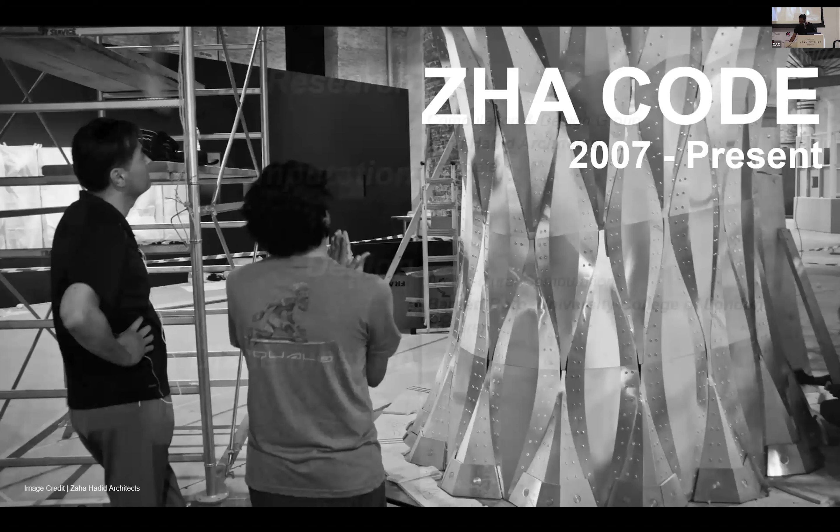On a day-to-day basis, we do three or four things: research in computation and design, and also write and disseminate this knowledge, first within the office, but also widely through workshops around the world.

A bit about the CODE team, an acronym for computation and design, started in 2007 by Nils Fischer, Shajay Bhooshan, and Patrik Schumacher, who is the principal. It started off as a project-independent research group, looking at geometry processing and digital manufacturing technologies.

As the research has matured over the last 15 years, the kind of projects we do in the company has also changed. Early on, we were doing smaller scale projects, and as the technology has matured, now we are able to apply the same to larger scale projects like stadiums, infrastructure projects, museums, etc.

The team is currently made up of 22 people, mostly architects with varying degrees of interest in computation and design. Some are more interested on the compute side, developing tool sets; others are more interested on the design side, how to use computation in early stage conceptual design.

The research strands we have in the team look at four things: high performance geometry, game tech and participatory systems, future twins, and machine learning and AI. Hopefully I'll cover a bit of each of these topics in the presentation.

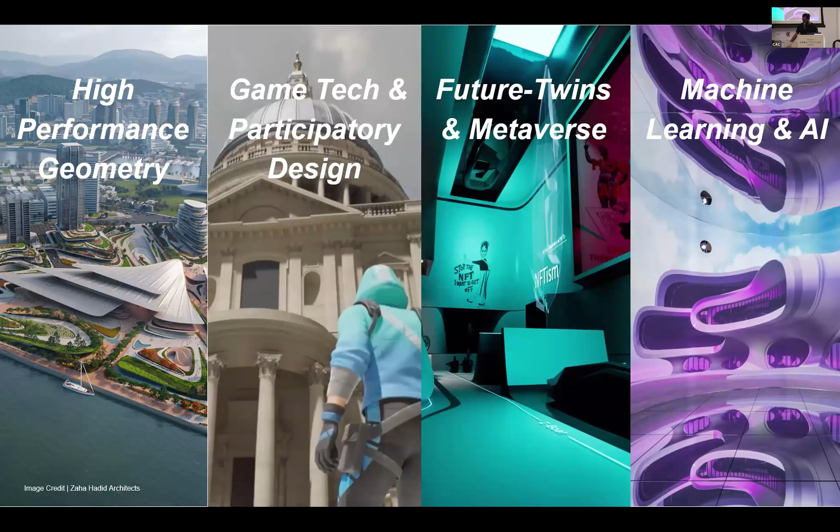Typically each of these strands goes through four steps: you start off as project-independent research, develop toolkits, and showcase its application in what we call pilot projects or special interest projects. Once the tools and technology are robust enough, they get applied to larger scale commercial projects in the office.

So the presentation is structured as follows. We'll talk about the framework which powers all of this, looking at the current technology demonstrators we are working on, specifically focused on digital concrete. Then we look at how we are making these participatory systems using geometry for all, and also future twins and AI systems.

So the spatial technology stack, what is it? We call it Z-Space. We believe architecture is a cultural production enabled by technology. It has been the case since the beginning of times. Even if you look at Gaudi structures, we're always blown away by the spatial qualities and visual imagery of the spaces, but there has always been a technological remit powering it, in this case graphic statics, masonry structures, and so on.

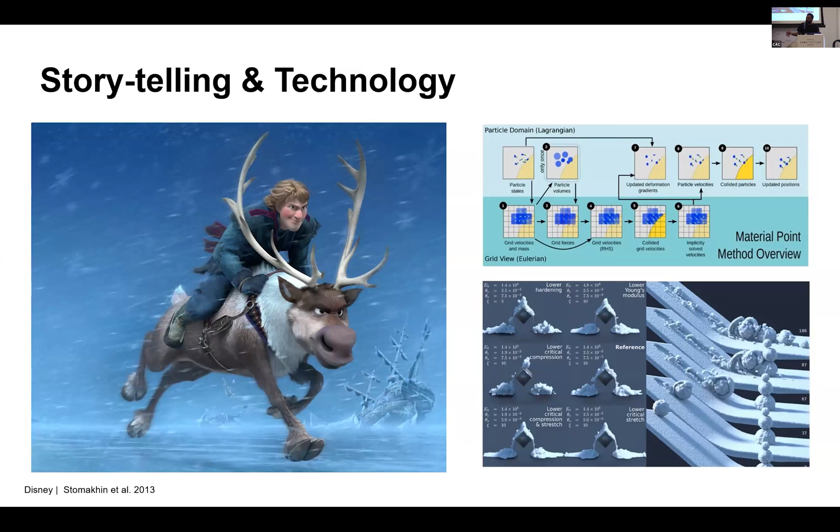Same is the case with computer graphics and animation industry. We're always blown away by the visual aspects of these CG movies, but if you look deeper, the technology supporting it, as explained in most of the presentations today, is also very novel, and these could easily be adapted into architectural design as well.

So as a group, when we started looking at the framework, we wanted to look outside our lamppost. We're mostly architects, and we didn't want to find solutions only within our remit, but to look at someone else's lamppost so that we can borrow and build upon what's already there. So what can we borrow from animation and the computer graphics industry?

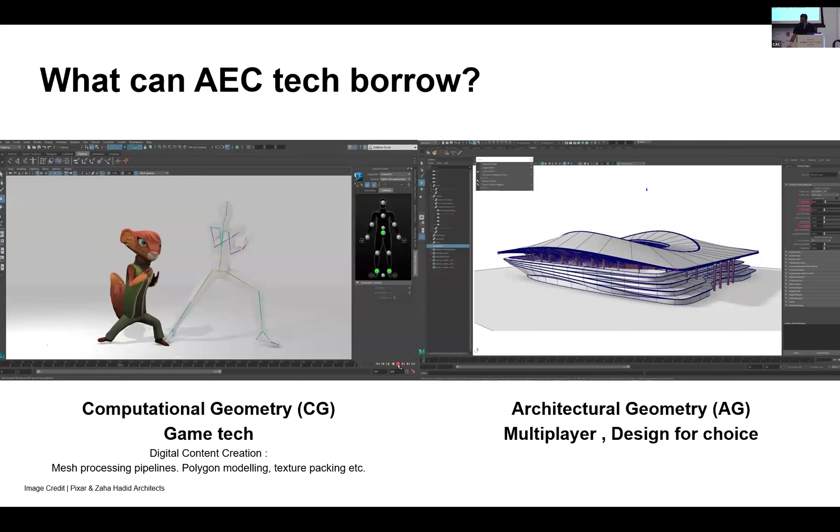These technologies include computational geometry, a subset of which is called architectural geometry in architecture. Game technologies you can borrow for multiplayer systems and designing for choice—we'll take a look at that as the presentation goes on. You can also look at file formats like USD, which has been around from Pixar for the last 30 years or so, and you can now access those much more easily through NVIDIA's Create Kit.

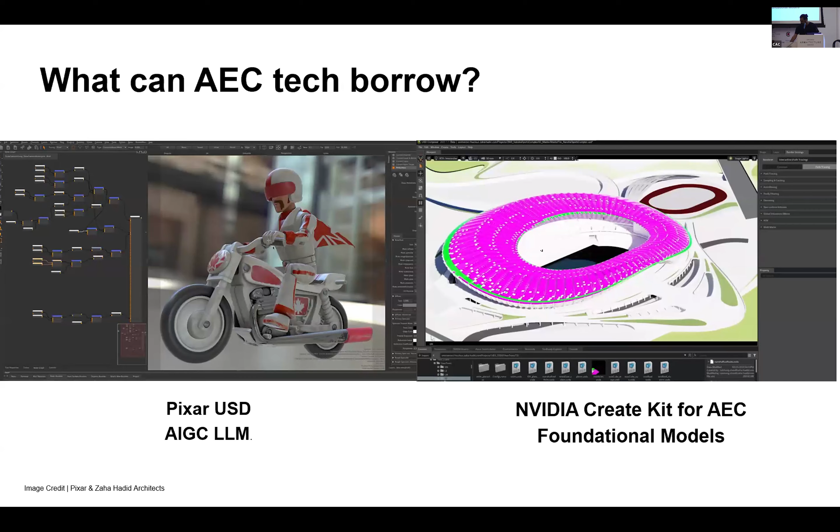The same goes with AI as well—there's a lot of foundational models we can borrow, and then build on top of it the architectural applications we want. So basically, a spatial technology stack is a combination of these divergent spatial technologies, which includes architectural geometry, game technologies, and AI. The framework itself borrows from a wide amount of research happening both in academia and in industry, in technology companies like NVIDIA and Autodesk, etc.

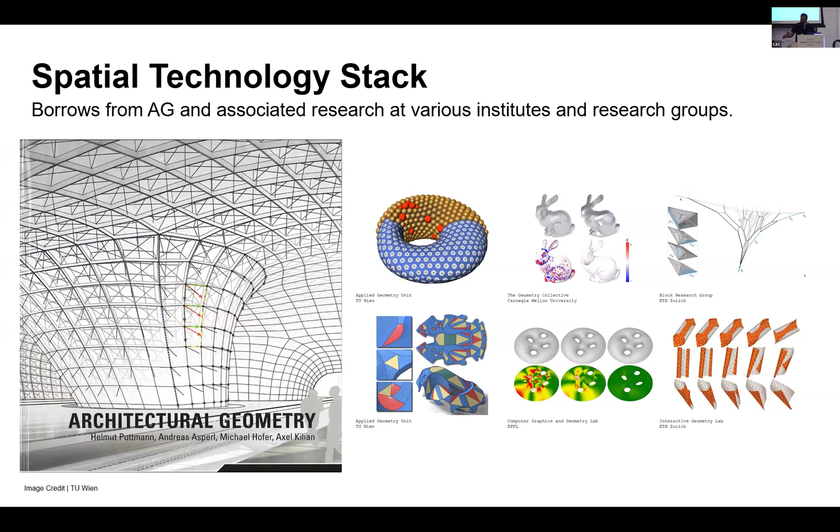The spatial technology stack, as we currently have it, covers both the content creation aspect, where typically we've been involved in early stages of design. It involves a lot of geometry processing, creating tools amenable for robotic and digital manufacture, like 3D printing. It also looks at later stage delivery of projects in schematic design and DD. In between is the game tech, which powers all the configurators, integration of our tools in games, etc.

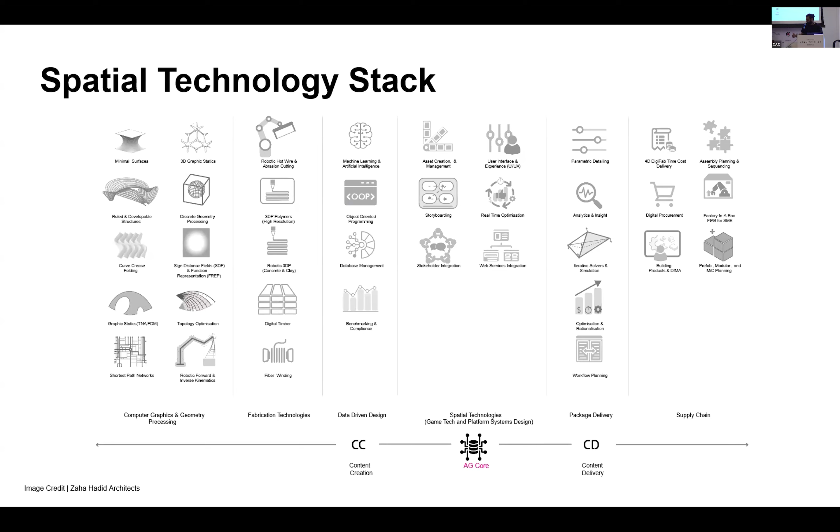The stack is also independent of the softwares we have in the office. You can see a wide range of softwares we use, from conceptual tools like Autodesk Maya, to delivery of the project in Revit, Rhino, and now also looking at Omniverse, Unreal, etc.

Looking at the first aspect of high performance geometry, I'll take you through a project which has been a collaboration with the Block Research Group at ETH, who are researching masonry structures, and Incremental3D, a robotic 3D manufacturing company, along with Holcim, the material research company looking at creating custom inks for 3D print.

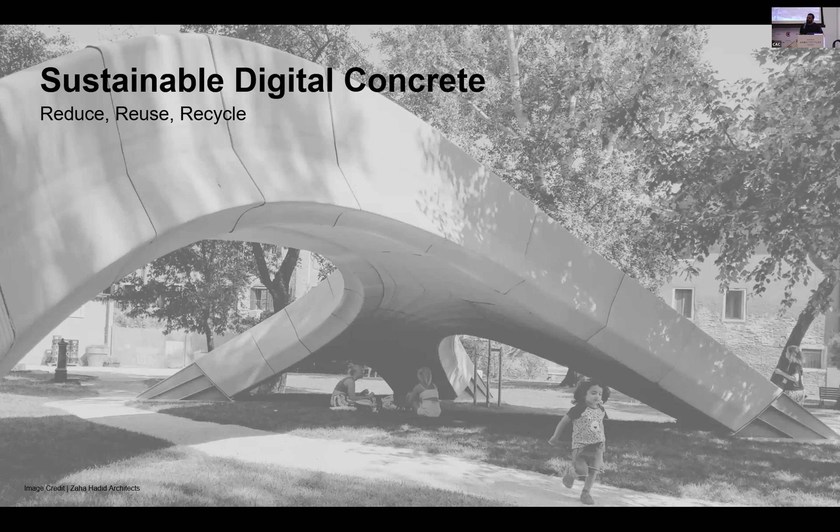When we started the project or collaboration, we were trying to bring up a new language for concrete, using the wisdom of masonry and adapting it into digital technologies of manufacture. The goal was to have these 3 Rs: reduce the amount of material required, reuse the blocks which were printed, and recycle by doing material separation. All of this was achieved through what we call strength through geometry, trying to reinterpret masonry structures using 3D printed concrete blocks. You can think of these blocks as synthetic stone. This is possible because you're aligning your systems or the geometry into the structural force actions.

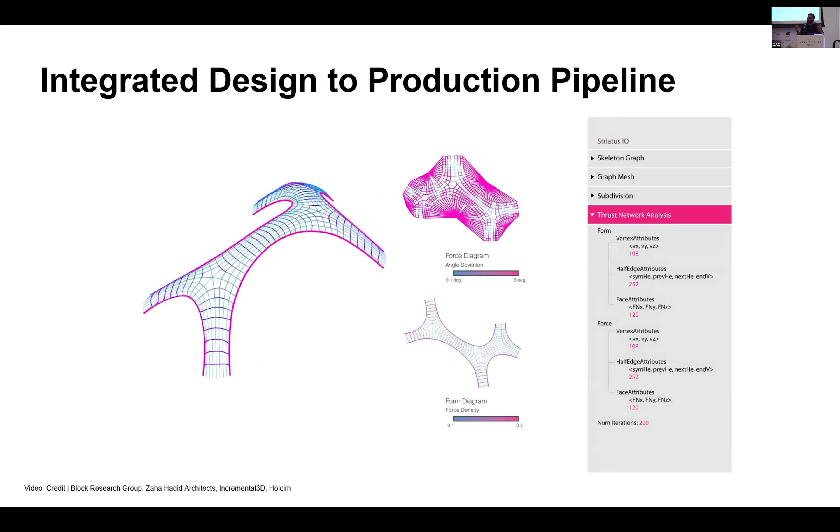This was all made possible through an integrated design-to-production pipeline, where we as designers, structural engineers, and fabricators were all able to collaborate on one platform. That platform considers the file format you see on the right. As each and every step is being done, a schema or additional attributes are added into the file format.

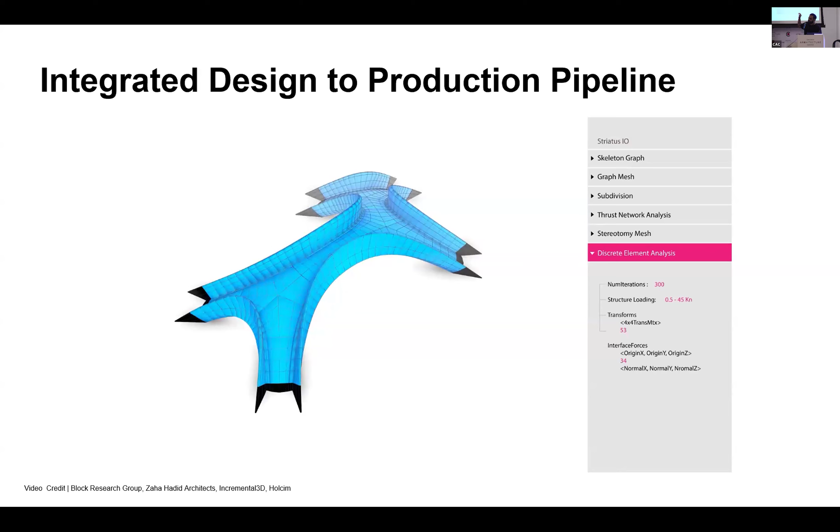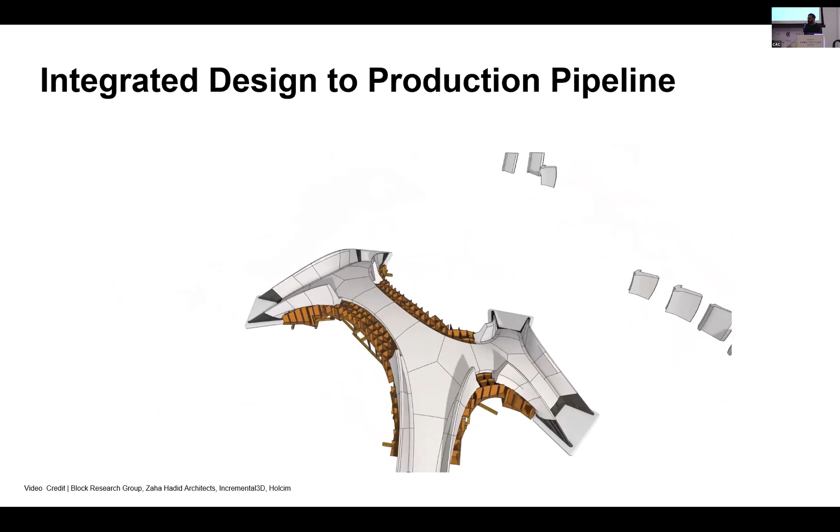This includes going from generation of the geometry, the structural performance using form finding, then looking at stereotomy of the blocks, splitting them into 100 blocks or 50 blocks, right towards the end of the G-code of each of the blocks. It can also store schema, which also enables you to store the sequence of assembly, what should be the scaffold in this case, which was one of the items of research we continued further.

What was useful about this was we, as designers, could make changes on the design till the last day, till the robot was pressed play to print the blocks. This was printed by Incremental3D in Innsbruck.

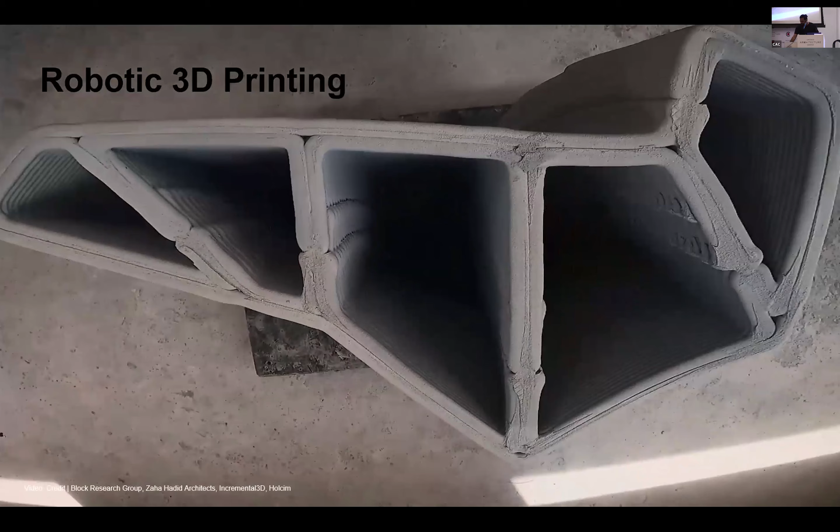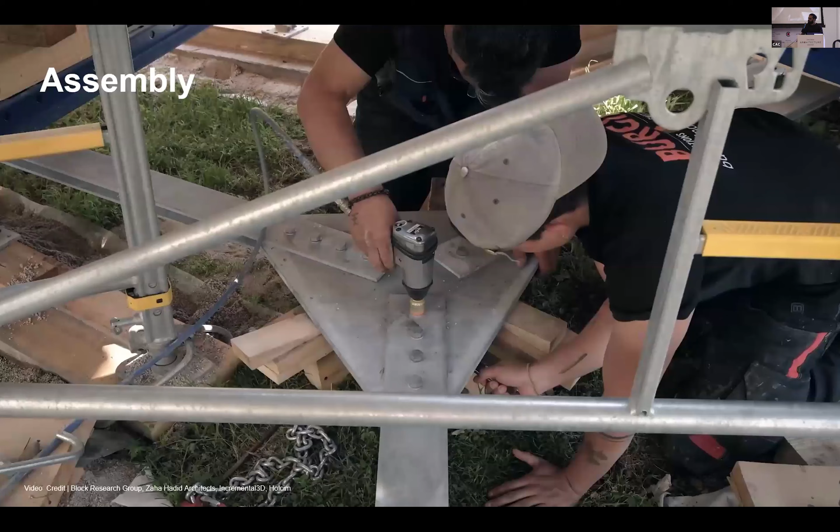On site, this was for the Biennale project in Venice. All of the blocks were shipped over. Some of the blocks were as big as 2 meters in height and 2 meters in width, and these were assembled one by one on site. You can see in this case we had to use a single-use scaffold waffle structure. This was done because of lack of time at that point, but this was subsequently researched in the next version, which was a more permanent version of the bridge.

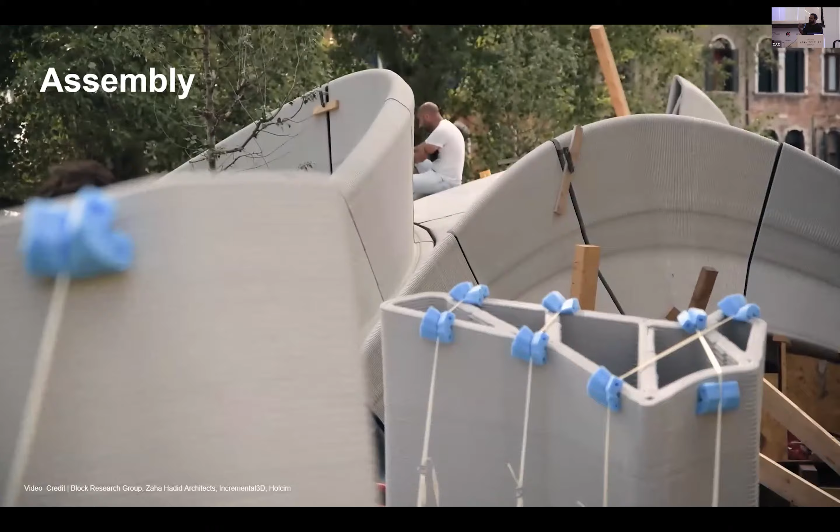In this case, you can see these neoprene pads, which give friction. There is no glue holding these blocks together. Once the last keystone goes in, it performs like an arch, and the whole structure stands in pure compression. This enables the material to be separated—if you want to dismantle it, it's easy to dismantle, take it away, and assemble it somewhere else.

Learning from the mistakes or the things we made in the first version, a more permanent version was done for Holcim to look at the long term. They wanted to research how the material performs over a period of 5 to 10 years. So a permanent version was created, called Phoenix.

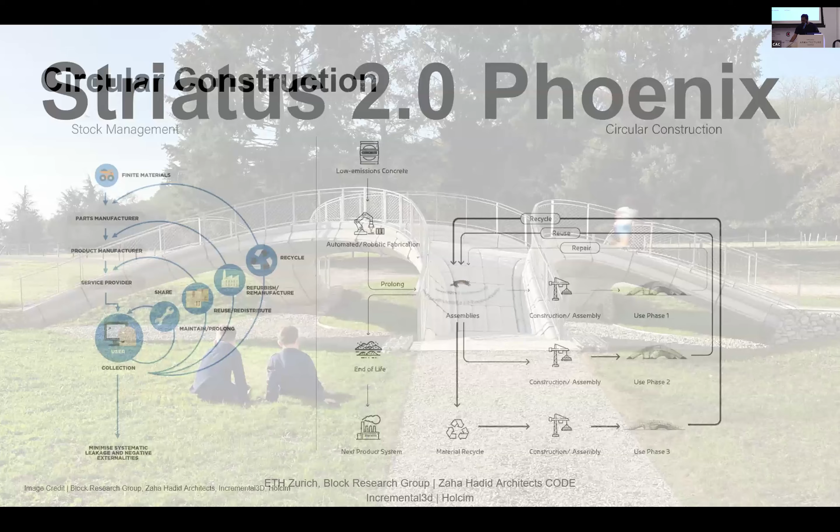In this case, we were looking at circularity of construction. As I said, the materials were disassembled, and the same material was used to recomposite and build the new blocks of the new design. The design was changed to accommodate all the variations and updates we could think of, both in structure and fabrication, from the first version, but it also showcases that the material could be reused. In the first version, we used steel as the foundations, and that steel was used in some other project, not this one, because the concrete material itself was reused in this current project.

So the improvements we made were to again try to reduce the amount of material required. We went back and looked at the bracing strategies, and the more important change was to reduce single-use scaffold systems. You can see the image on the left has more timber waffle material, but on the right we were trying to use mostly reusable steel scaffold. Because it's a double curvature geometry, you still need some amount of waffle structure, but the amount of wood used from version 1 to version 2 is about 50% less.

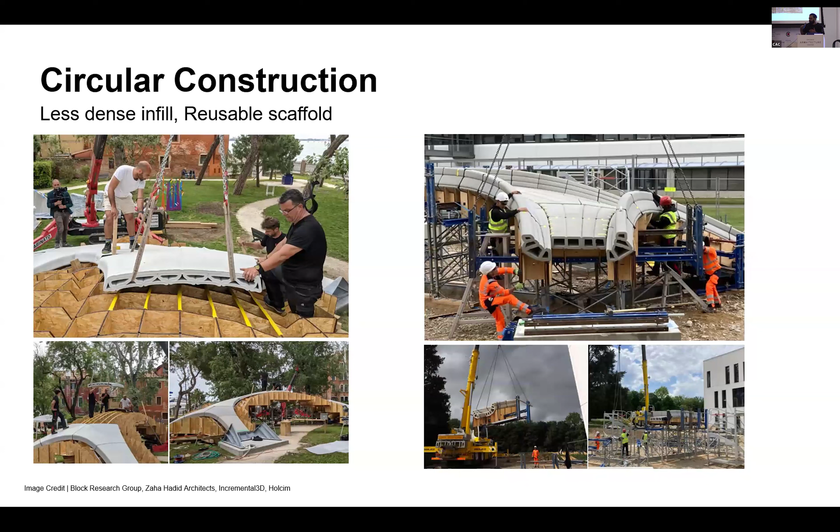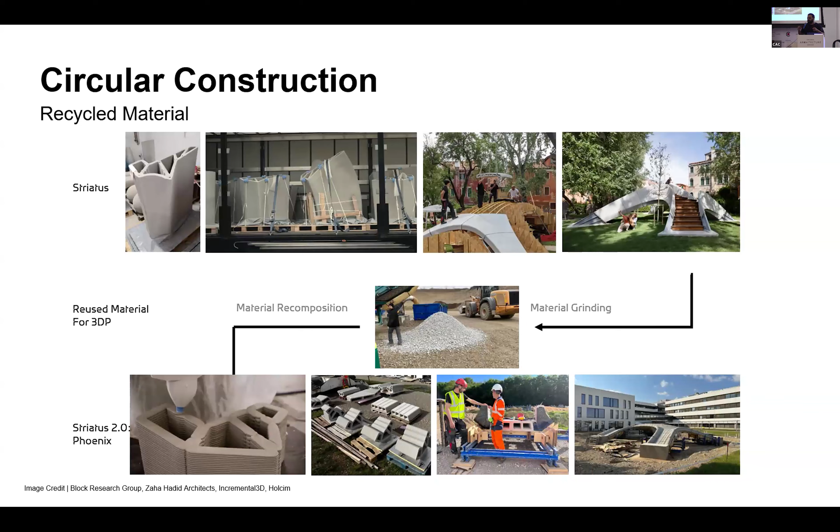All of the material used in the previous version was recycled and reconstituted into the new blocks. The new blocks were also made slightly smaller so it's easier to ship and assemble. Previously, in the first version, we assembled one block at a time, but in this case there were like 6 or 7 blocks assembled at one point and put in the correct position. So this technology is now getting more widely accepted, and this is getting continued on.

Okay, the video doesn't seem to work, but we are building hydrogen stations for Natpower, which is using the same technology to build hundreds of these stations in the Mediterranean.

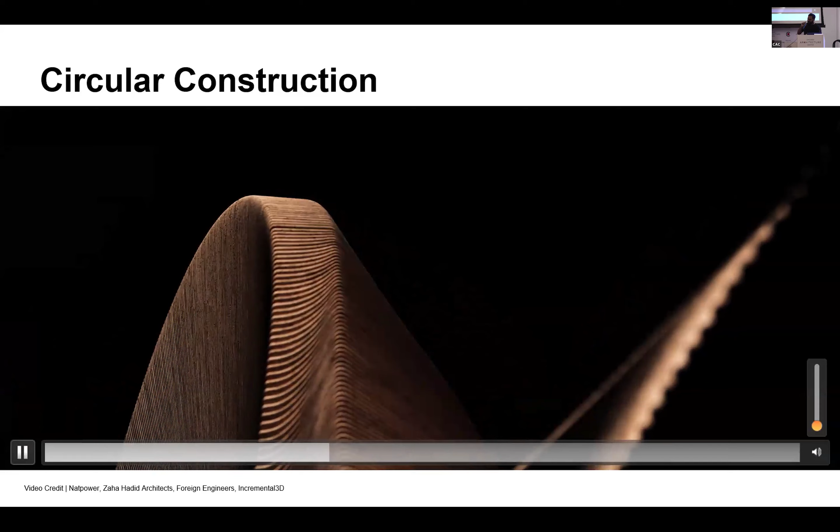Okay. The link's great.

So the research is actually being continued forward, looking at 3D printing, now with carbon negative concrete. This is research we are doing with other collaborators, specifically University of Ghent, where we are trying to build up a mix, a 2K mix, for carbon negative and carbon neutral concrete, and then showcase its applicability in architectural build systems. These kinds of research we develop further with other technology demonstrators and collaborators as well, looking at fabric formwork for concrete, robotic hot wire cutting, thermoplastic printing, and so forth.

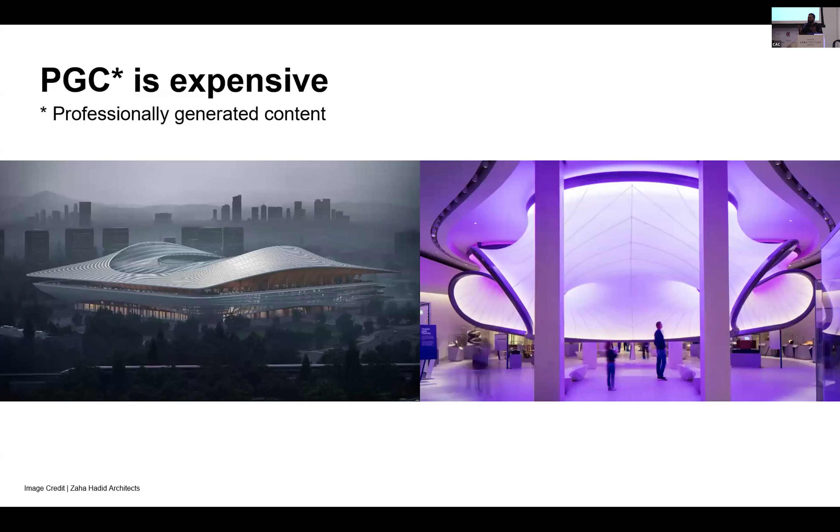The next aspect we wanted to show was called geometry for all. The things we showed previously, looking at developing custom tools and custom research, are predominantly at the initial stages very expensive, because a lot of time goes into creating these tools, researching them, and making tools applicable to design, and so forth. This has been, as you can see, looking at tensile structures, 3D printing, hot wire cutting. All of these novel technologies take time to understand and build custom tools for design.

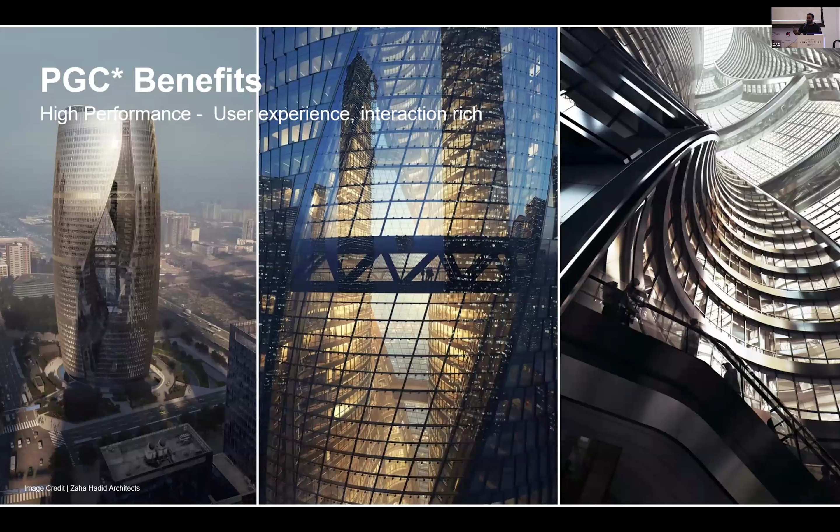But at the same time, we saw benefits of looking at professionally generated content, or PGC, because they're immersive, spatially coherent, and spatially very interaction rich. We also saw in the previous project there are structural benefits, material benefits, and they are high performance, so you can use lesser materials to achieve the same geometry. So these are all the benefits, but at the same time they're expensive and time intensive to make.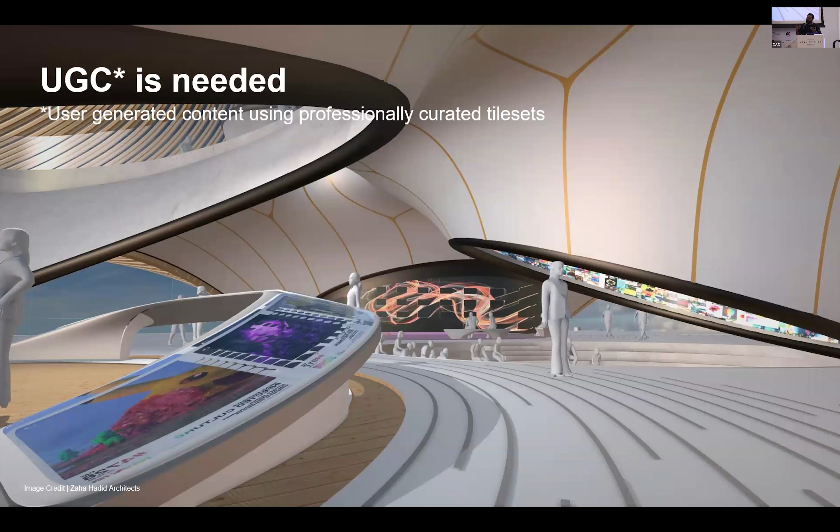This is why we are now looking at user generated content, using tile sets which are professionally curated. So once you have sections of an architectural component, you can use the crowd to create variations and multiple options. This was done as a collaboration with UEFN, or Unreal Editor for Fortnite, which is a shooting game, but they have now opened up Unreal for Fortnite as a creative developer platform. They were collaborating with us where we created these tile sets to build a game system for districts in London—a mixture of residential buildings, office buildings, and so on, mixing that with the land use available in London, reimagining the city by developing certain districts.

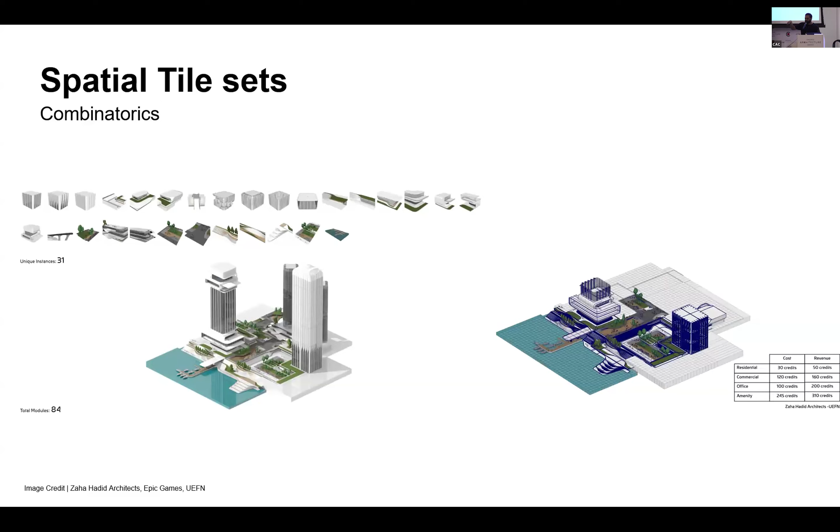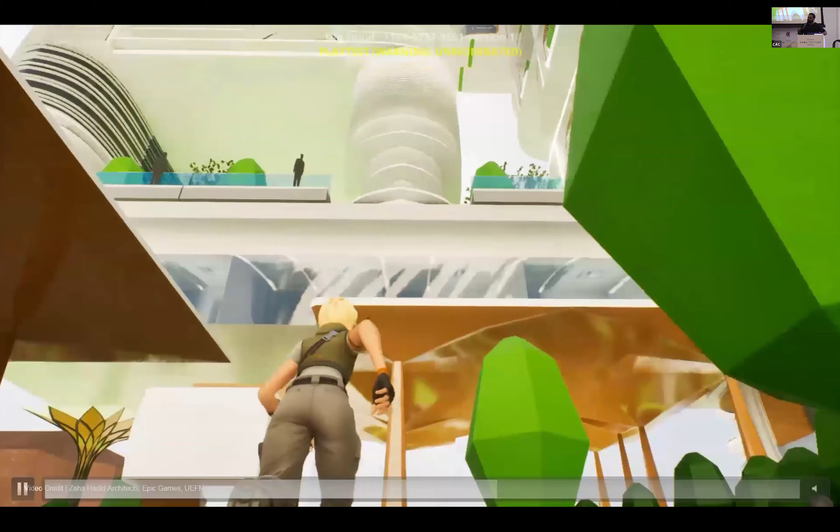This game was launched in September, about a month ago, and it's currently still available, so if you're interested, please log in and play. This is an instance of people using the game setup to create their own offices and landscapes, and each of these has a score attached to it. If you're making good designs, you get a higher score; if you're making random things, there's no negative score, but you get a lower score. So this is enabling a lot of people to create. We're also trying to integrate this into educational platforms so more architectural students can have access to it, develop these geometries, and then subsequently set up the gameplay as well.

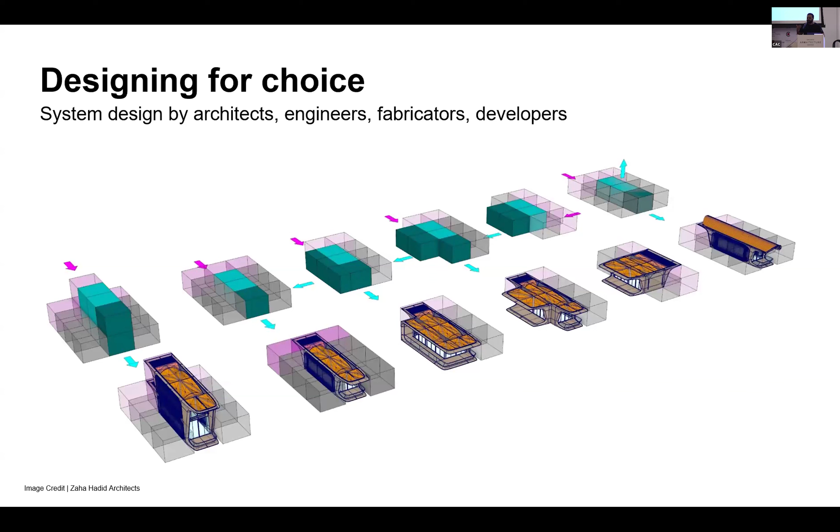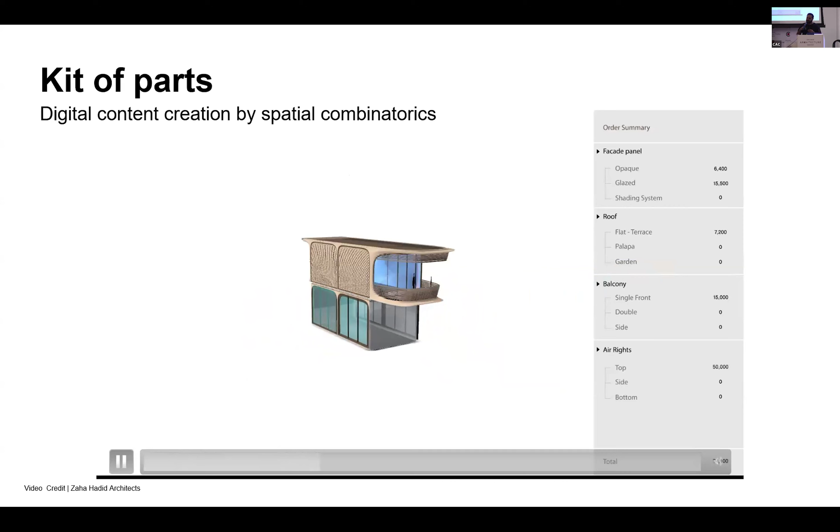You can also extend the same technologies further into architectural platforms. In this case, a systems design for architects, engineers, fabricators, etc., to create a kit of parts which is already structurally informed and fabrication-wise informed. Once these systems are developed, you can procedurally generate a combinatorics of what the units could be.

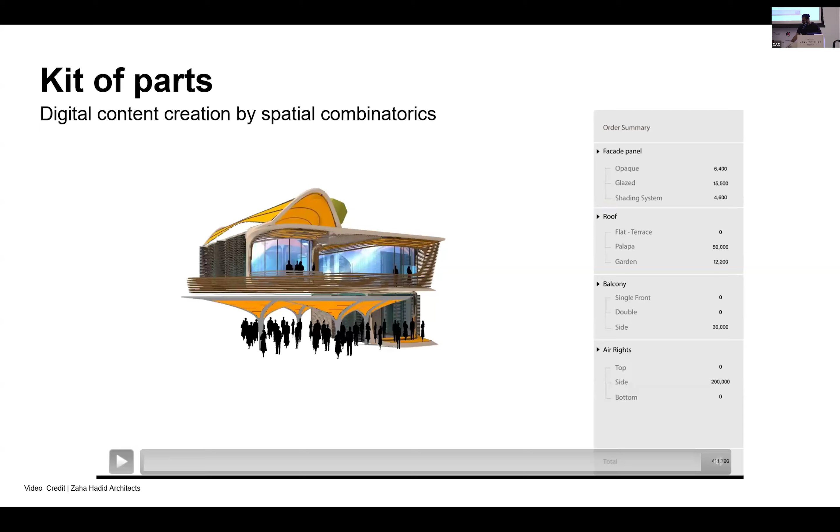Because it was done in collaboration with the fabricator, you can also track cost on how much it's going to take to build. And if you're an end user, it will also show you the cost for you. So this was then integrated into a web platform.

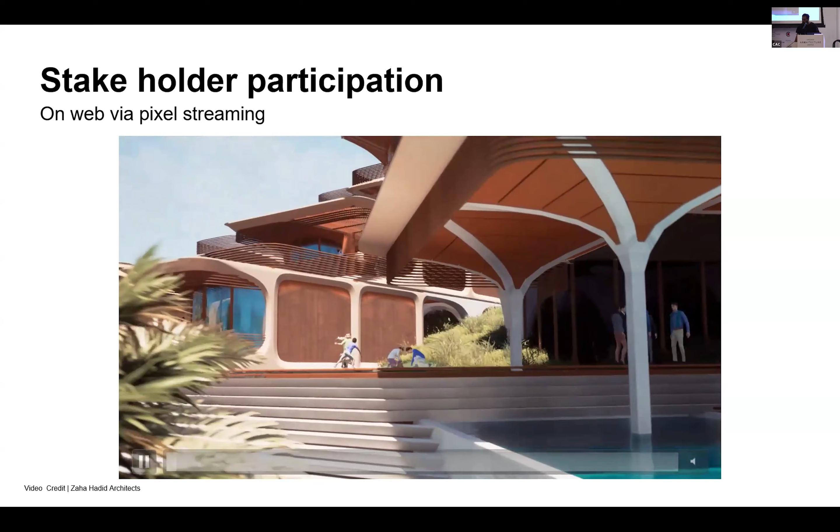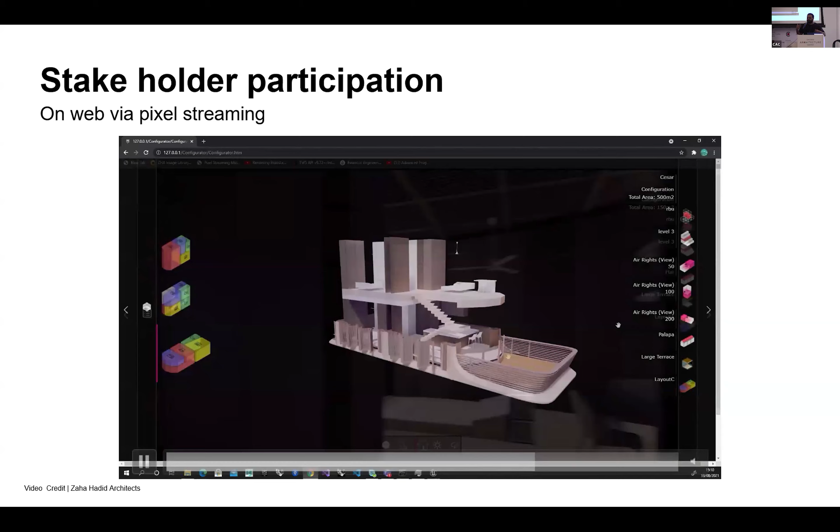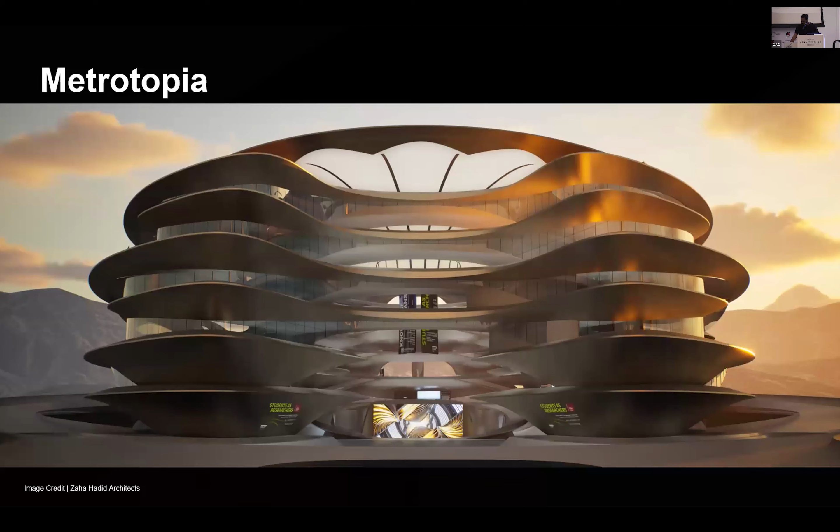Once these geometries are already integrated into the web, the natural next step was to put it in the metaverse, or what we call future twins. We are currently building a ZHA city inside of the metaverse called Metrotopia, where we are collaborating with other architects to showcase their content in these kinds of exhibitions. It also enables formatting files to be put on the metaverse.

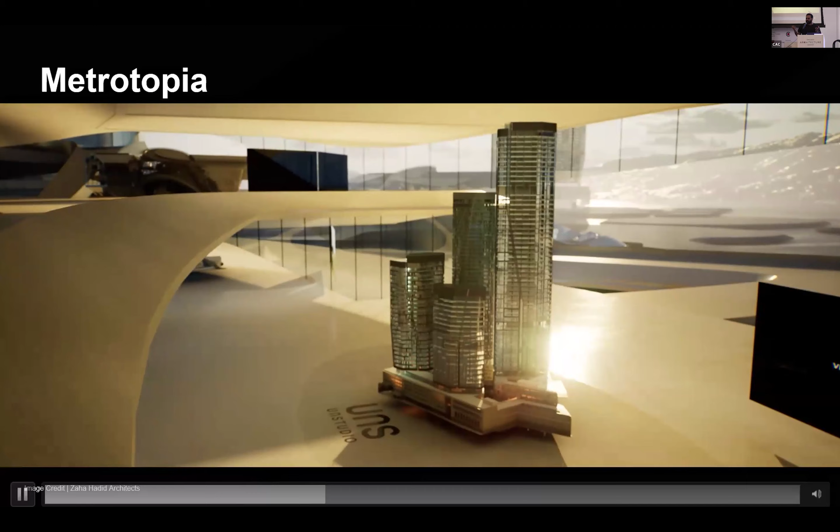We also do the optimization as well. The city itself is also showcasing designs which are unbuilt by ZHA, and that's also part of the landscape, so people can come in and have meetings as well. A lot of the clients, we take them into Metrotopia and showcase various typologies of buildings we have done so far, giving them an immersive experience.

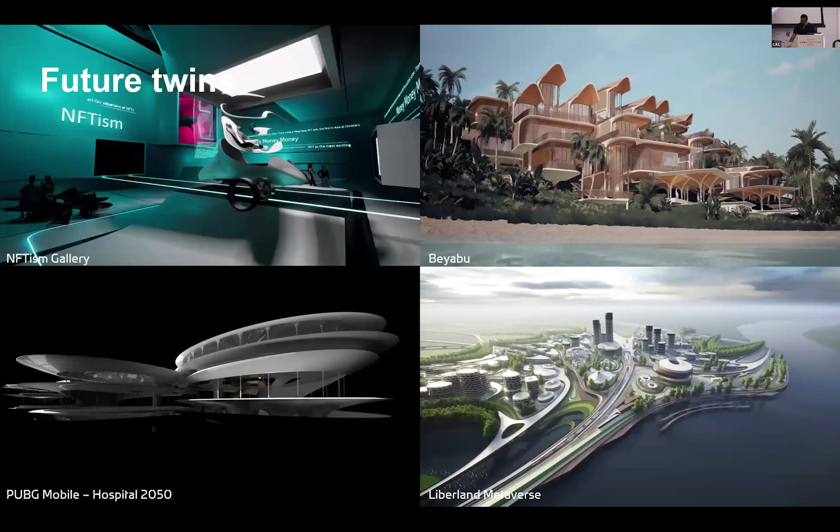All of this is currently being developed. We also do these future twins for buildings which are not yet built - that's why we call it future twins - for the Beyabu residence we just saw, or landscapes or master plans.

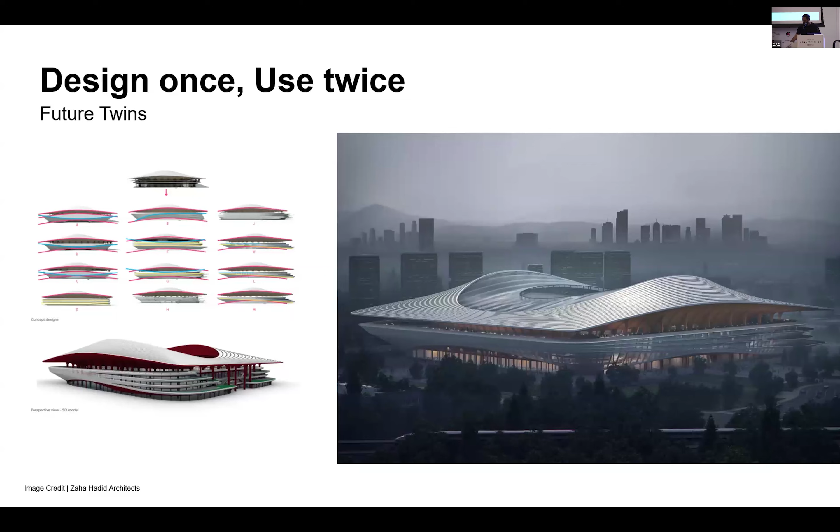You can also simulate how the city is going to develop over a period of time, and if it's virtually feasible, then you can build it in the physical world. This is heading to a paradigm of what we call design once, use twice. So you design using the same technologies, designing the building first for physical realization, in this case a stadium.

Then second, you use the same geometries - you don't need to rationalize it because they're already rationalized for both use cases - and then put it on the web. In this case, this is also a metaverse for the stadium the client wanted, so that the home fans can actually enjoy the stadium on the web as well.

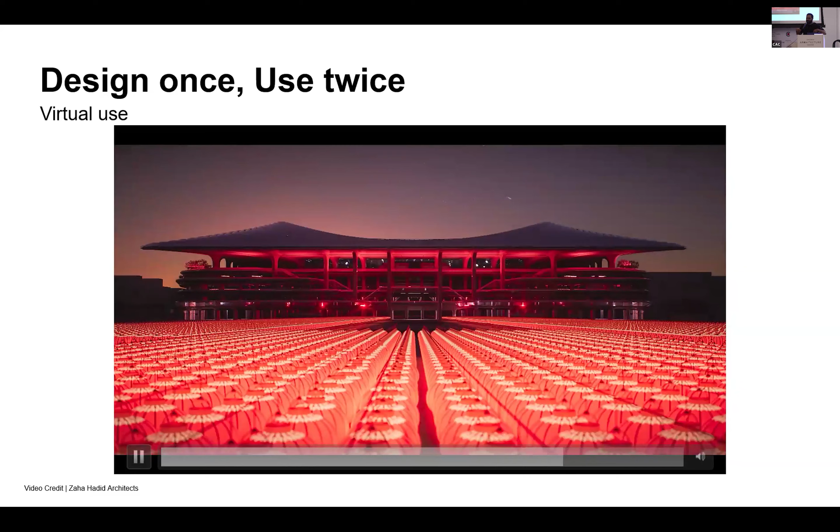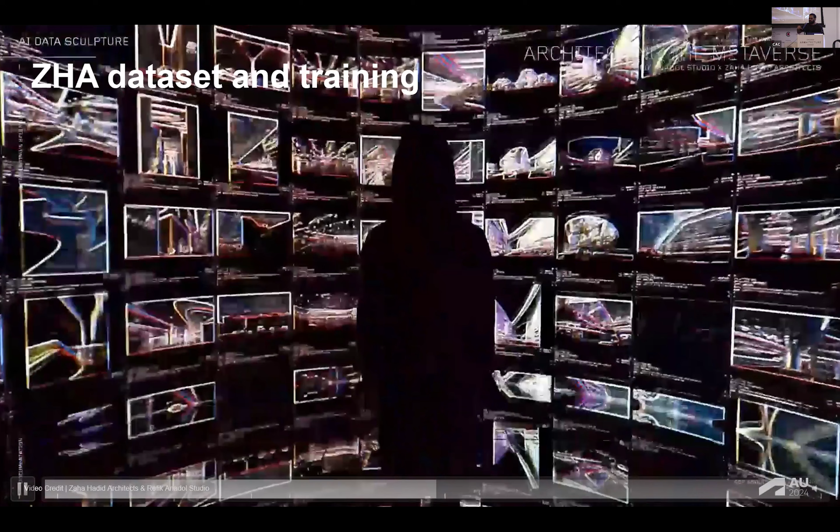Moving further, looking at AI and machine learning. Diffusion models - like most people in the room are familiar with diffusion models - we also started with the same, looking at how to augment existing foundational models with data sets from our 3D models, photographs of built projects, and renderings, trying to develop a trained model to generate outputs similar to the work of the office.

So these were some initial outputs. This is again almost 2 years ago. Technology has developed much more rapidly since then, but these were some of the initial outputs we were able to generate after training with custom data.

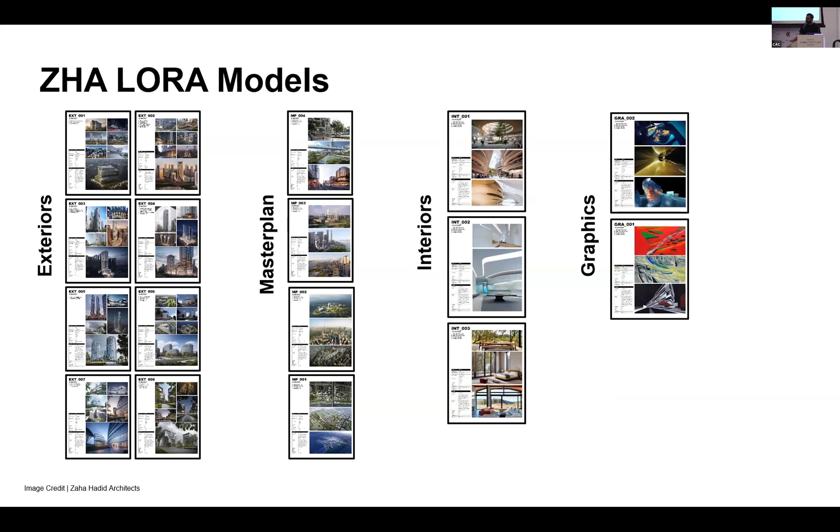Subsequently, we have developed multiple LoRA models using our own data sets, looking specifically at facade systems, master plans, interiors, and graphics. It's now being showcased for use in early stage design assist, where you can create ideations for master plans or facade systems by combining multiple LoRAs you have. Again, this is still only images, but it's used in early stages of the project.

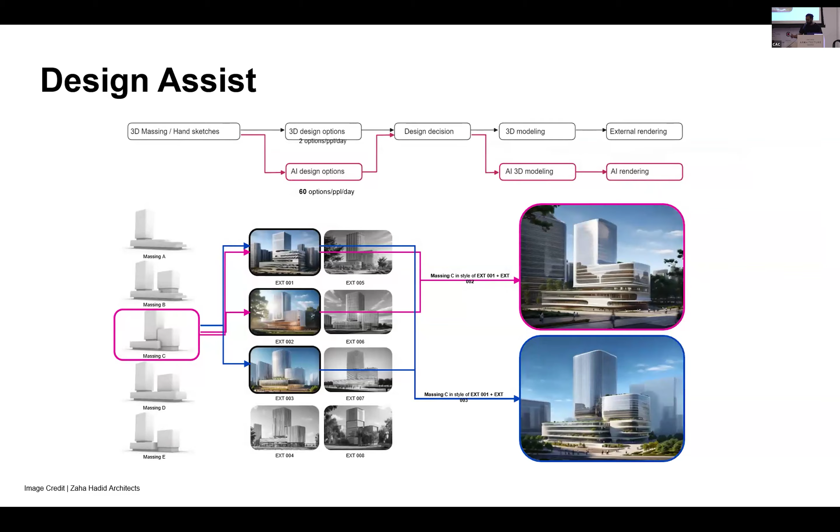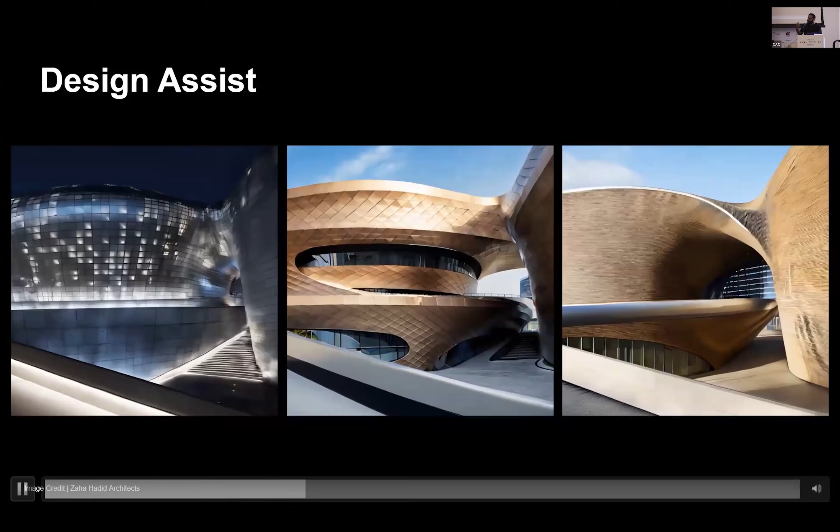We are also being commissioned to do NFTs. In this case, this was one of the NFTs we did for one of the museums who were our prior clients, which creates - they wanted to showcase multi-materiality of the museum they built. These were some of the things which were coming from the LoRA models I just showed.

How is it getting used in the design? It's integrated into platforms we use, like Rhino and Maya.

So as the designer is designing on the right, they're able to get visual feedback of how it's spatially performing as they go. Similarly, you could also call in stable diffusion models and other AI models in Maya. Same thing happens with McNeel's Rhino.

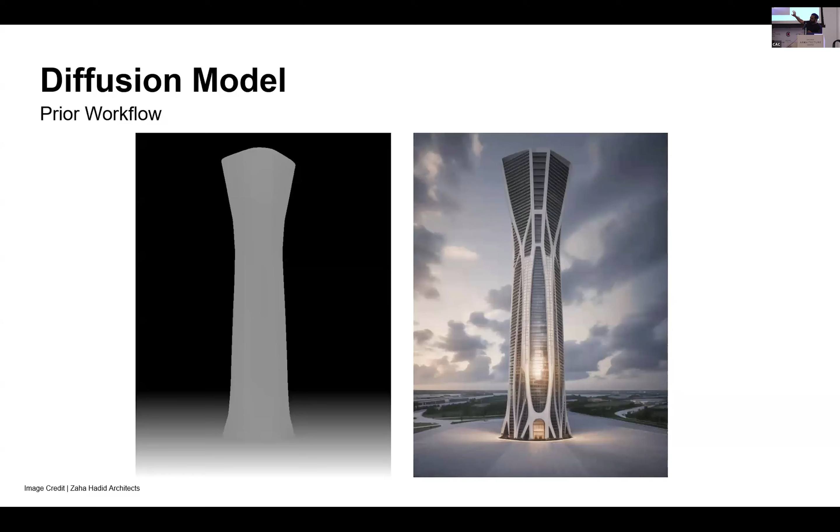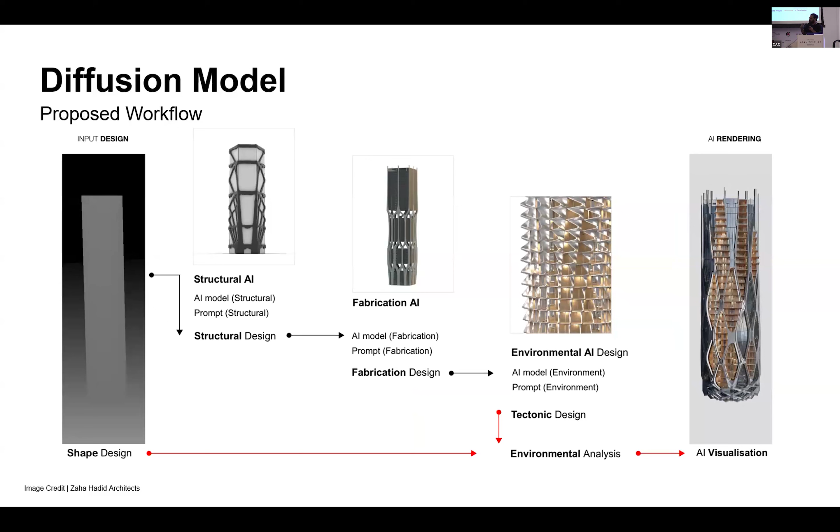What we are currently doing is trying to teach tectonic aspects to AI. Typically, this was the workflow: you have an image on the left, which is a depth map or normal map, and then you generate something on top of it. What we're currently trying to do is embed other information, even though it's just an image—information like structure, fabrication, material, or environmental related things.

So what we're currently doing is, based on the models we have from various architectural projects, we pick out the structural systems and tag them. You can see on the left what kind of structural systems become tags. Similarly, materials become tags, and environmental things like balconies facing north or south side all become tags, which you can prompt later on.

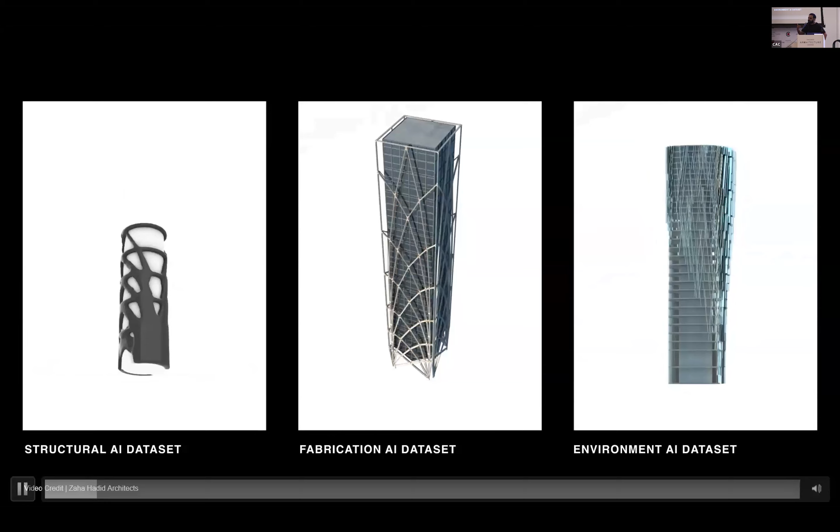This was a workshop we did at Digital Futures, where we explored that trained model set and what kind of outputs are currently coming out of it. This is still very early days. We were also testing early 2D image to 3D, but this is still showcasing the 3D models and the data sets which were used. Subsequently, you'll probably see the results coming up in the diffusion model.

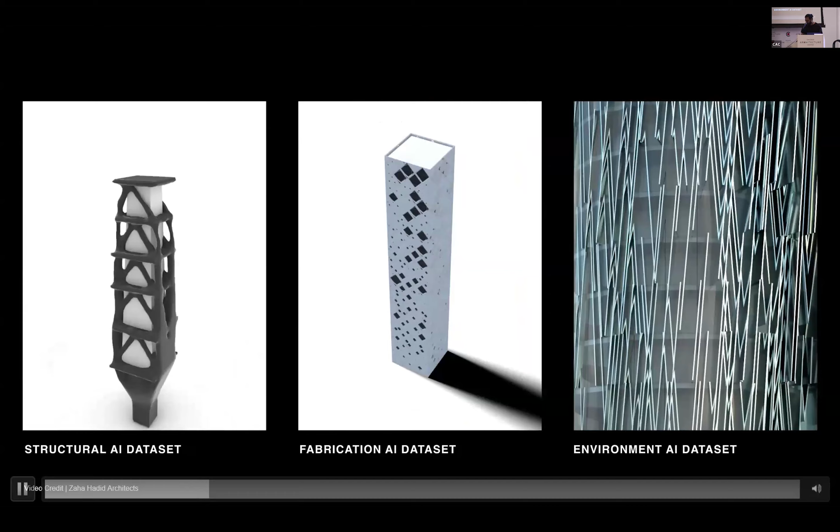The training of all of these actually was done in about 30 to 40 minutes using hardware from NVIDIA, and it was done on AWS. So these are some of the outputs you get based on the trained models and the prompts you give.

In this case, we were looking specifically at towers. And as I said previously, it requires good RTX cards to actually speed up your training process, but the whole training takes about 30 minutes to do.

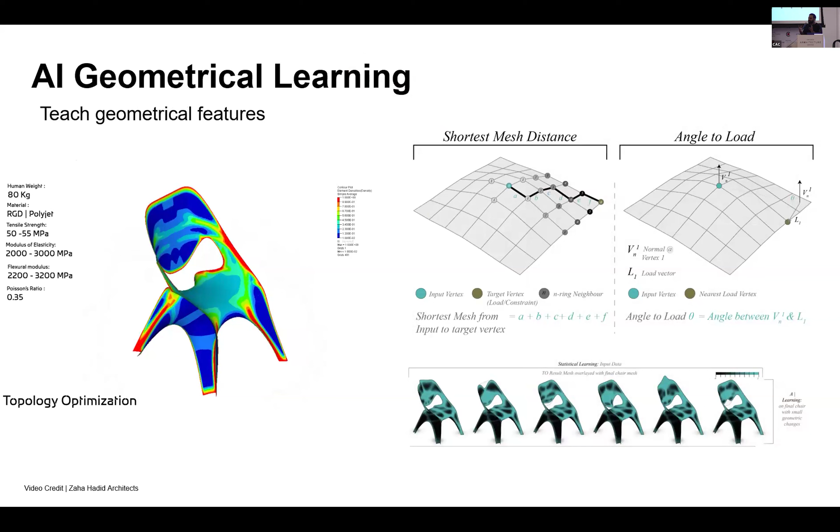But this is not where we want to be—we want to move away from just generating images. So we started looking at how we can predict structural simulations like topology optimization, which are like finite element analysis that takes a long time to set up and run. The compute time for these is typically 30 to 35 minutes, including setting up the model.

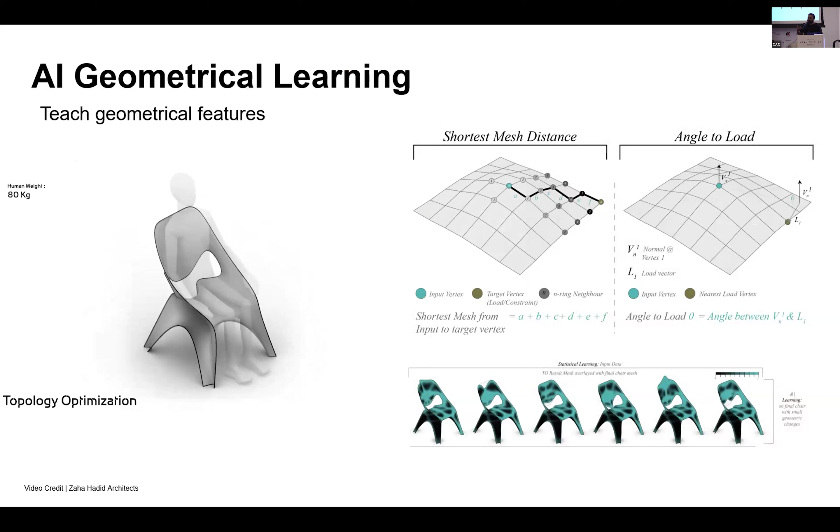But this is not the case when you're trying to work at early stages where design is in flux. When design is in flux, even predicting models which are 60% or 80% accurate is actually much more feasible. And if it's quick, it's much more feasible to have that model rather than a much more accurate simulation.

In this case, we are trying to predict by learning from geometrical features. So from all the analysis we've done previously, we're attaching it into learning from geometrical features and predicting them. You can see it's giving, in this case, still only a chair, but now we are applying it for architectural buildings.

What we are also doing is tagging these data sets we have from projects within the company. All of the procedurally generated content is becoming structured so that we can attach procedural generation of these geometries into a large language model to learn from, to see if we can generate more sequences of operators for creating geometry.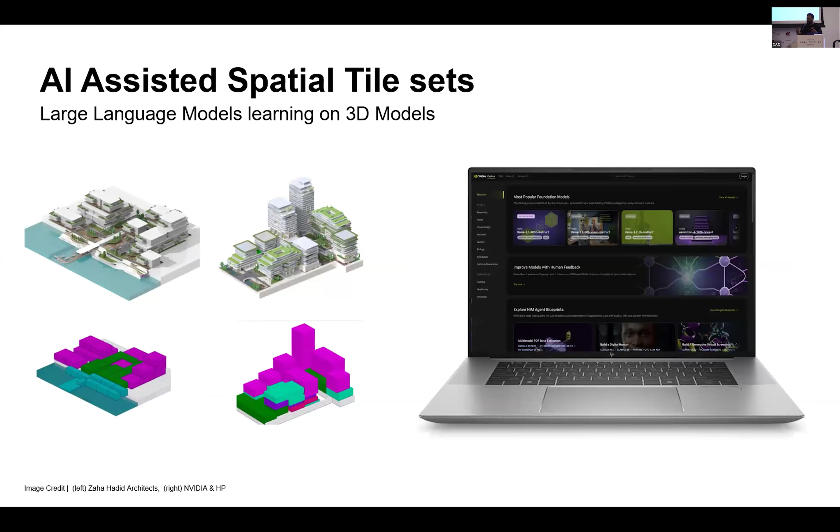So hopefully, using foundational models which are now publicly available, as George was saying in their NIM platform, combined with our data sets, we want to create AI assisted spatial tile sets using prompts.

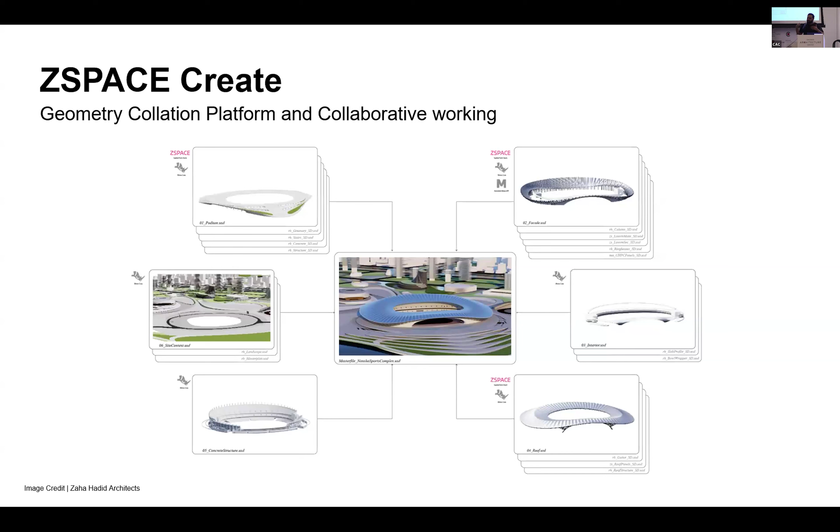So all of these tools are coming together in one platform called ZSpace Create, which is built on top of the Omniverse Kit app, where we are trying to create a collation of geometry and tool sets. In this case, showcasing some applications in a stadium project, where each designer is working in the platform of their choice, whether it's Maya, Rhino, Revit, and so forth.

It's enabling us to do a lot of large scale projects, bringing them into Omniverse so that I, as a project manager, just have to go into one file and look at all the updates. I don't have to go to individual platforms to look at it. There are a lot of native connectors to this, and if not, we build up connectors—in this case, building our connection to our own platform so that we can also do optimization related tools.

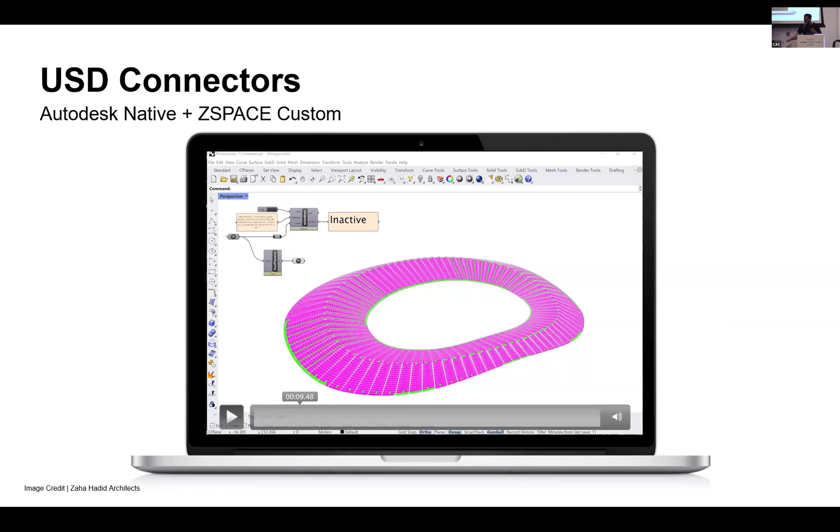So now you can integrate different tools which are specific to a particular platform. This is enabling the designer to use tools from multiple platforms which are good for those things. So if you want to optimize and rationalize things, there are tools available which might be performing much better than in Rhino. So you can send the schema out, optimize it, and then get it back. The schema is enabling us to use platforms for their best performance.

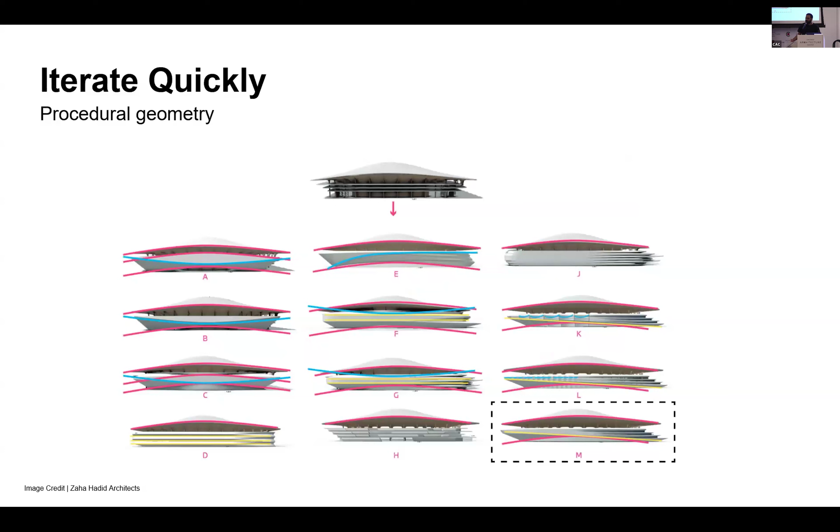The integrated platform is also enabling us to quickly iterate through multiple options because you have feedback from the structural engineers or the facade engineers, and so on. It's also enabling you to negotiate while designing with structural engineers or fabricators, to push back as designers and say there are alternative options we can explore, because all of them are in one collective platform.

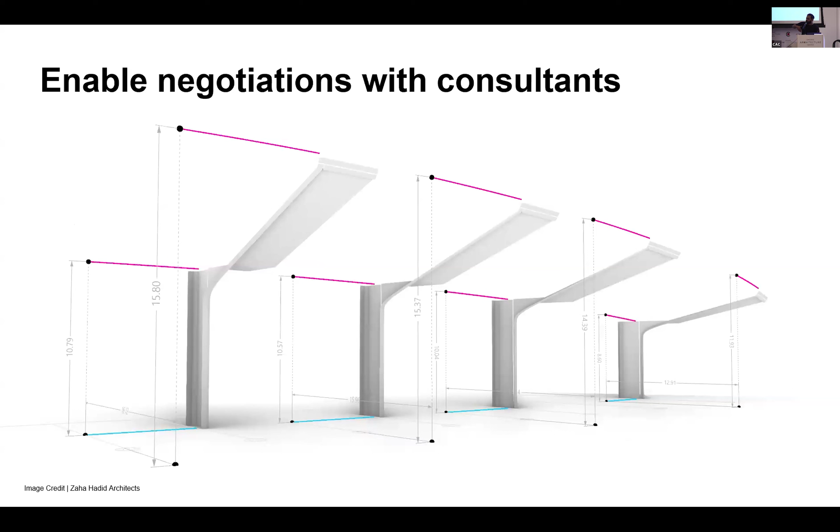It also enables you to transfer information between designer and fabricators very quickly, because you're trying to track down all the procedural nature of the geometry in its creation itself. The schema already embeds all of this information, so it's much easier to create all the geometry method statements for each of the projects.

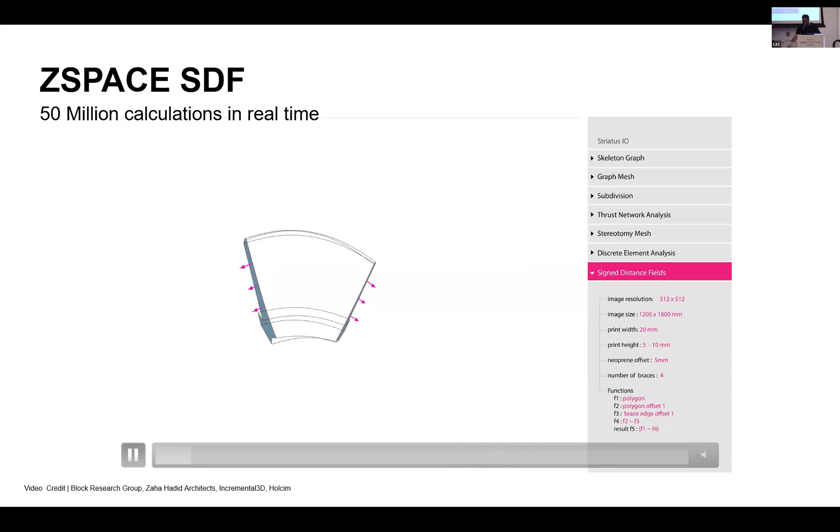Once integrated, you can also use GPU computing - in this case, looking at signed distance fields, which was done for creating all the print paths I showed for the project previously. You can also embed other information like structural simulation aspects. The GPU here is enabling about 60x acceleration, where as the designer you're making modifications, you already have information about energy consumption or solar radiation.

In the previous step, you could also do structural things in a similar way. So all of these tools are enabling us to augment designer intelligence and to support them in making an informed decision.

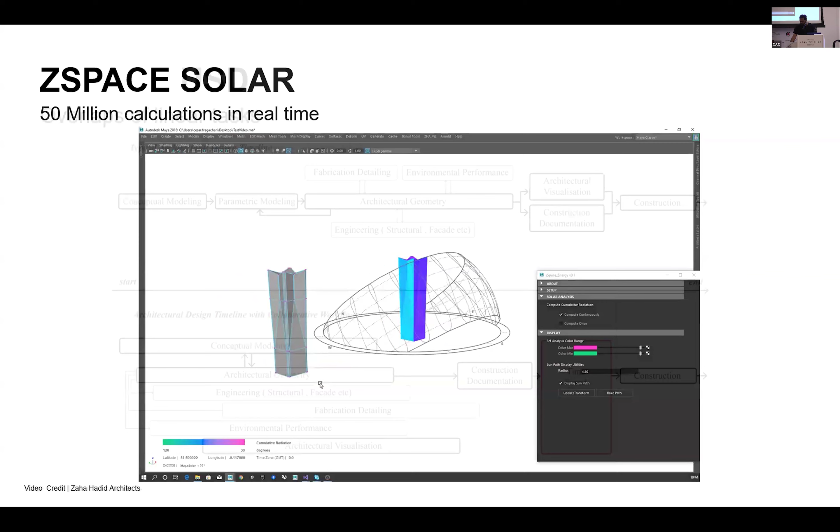What this is enabling is to create parallel, or at least overlaps, between the various sequence of stakeholders you have in an architectural project. It's not fully parallel, but even if it's 5 to 10% overlap as a conservative estimate, you save quite a bit of time.

And what's not shown here, you can see the construction is on the outside of that - that's also something, and there's scope for improvement. So if the construction aspects are also integrated in large scale projects, then you'll be able to quickly iterate and make a much more robust

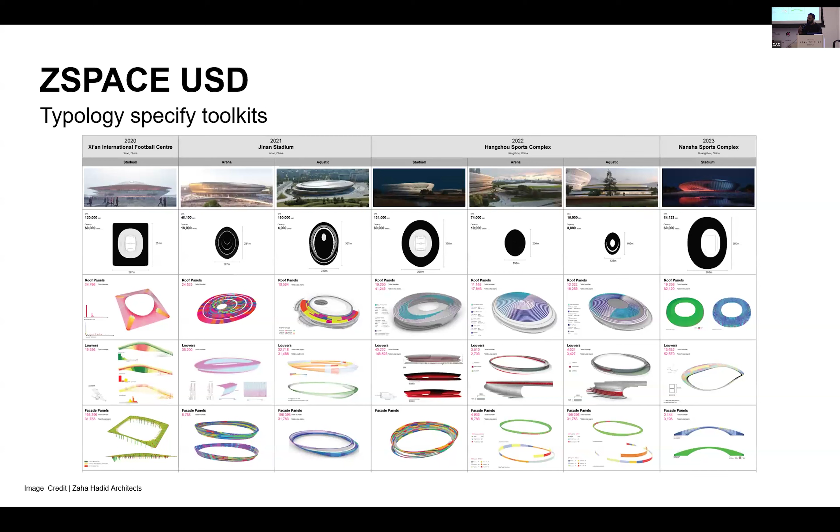delivery of the project. What this is enabling for us is to quickly iterate through and also deliver on a lot of similar typologies. These were like 6 stadiums we did in the last 2 years, and all of them were powered by similar kinds of tools. So we didn't have to rewrite any of the tools - the same tools were applied on multiple projects.

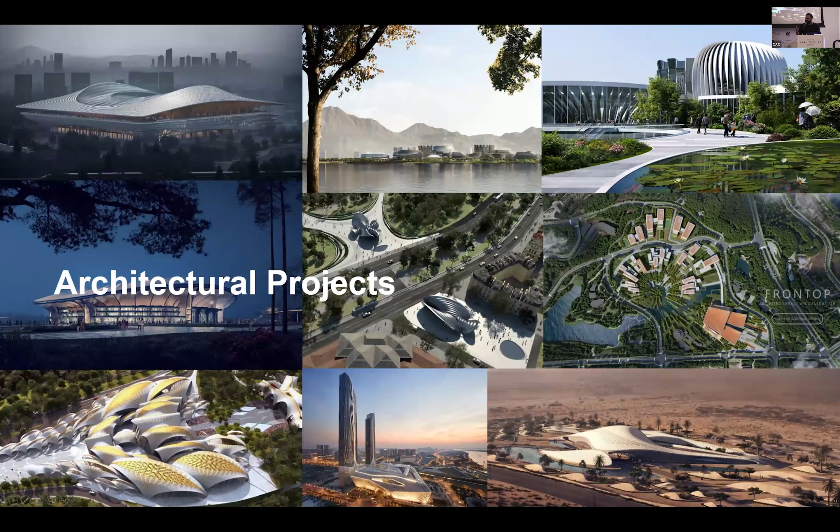And not only a single typology - we are doing that for multiple typologies like stadiums, master plans, residential buildings, and so on. So in summary, we saw what the spatial technology stack is, where it's borrowing from all the scientific knowledge, but also how it's getting applied into larger scale architectural projects.

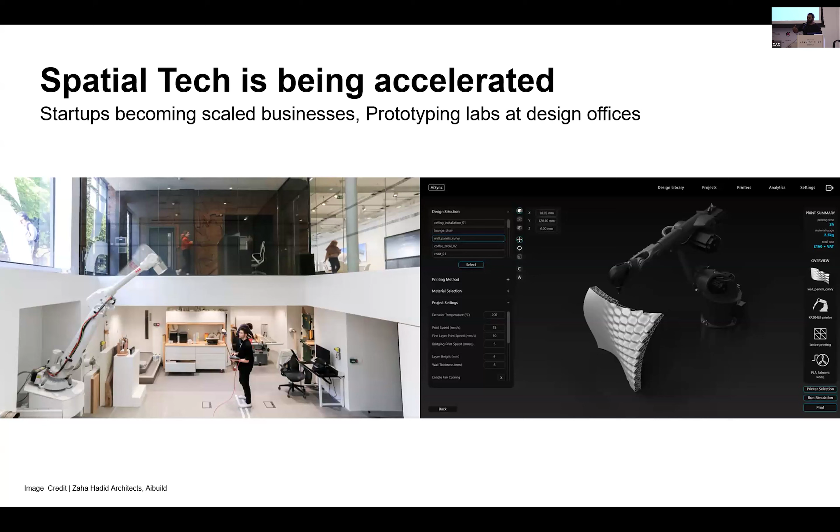And these kinds of spatial technologies are getting accelerated by a lot of startup businesses, which were initially, when we started developing the framework, all startups. Now they're becoming scaled businesses, but a lot of design teams are also investing into these kinds of prototyping labs within their environment. So there's a lot of knowledge transfer happening there.

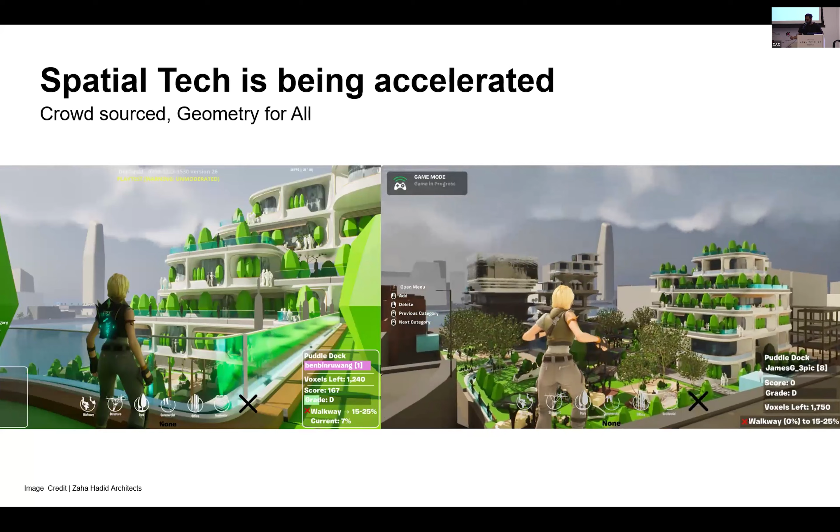As I previously mentioned, spatial tech is accelerated by introducing the crowd into the mix - generating using crowdsourced data or crowdsourced geometry. It's being accelerated by AI and hardware technologies, and by all the foundational models - tools are now available for a lot of people, so we don't have to make new tools. There are already existing open source tools out there which you can use and embed into your workflows, so you don't have to wait for it to be embedded into the platform of choice. You can just use standalone things and build up workflows based on that.